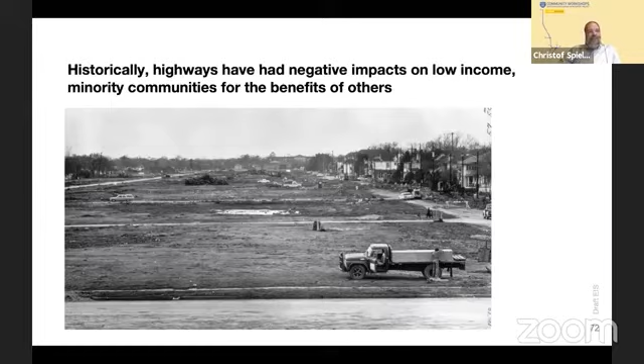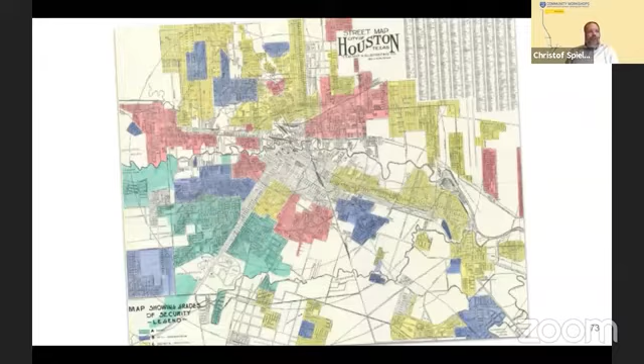If you look at the historical patterns of desegregation, of segregation, if you look at the historical redlining maps, you will notice the degree to which these highways were planned through Black and Hispanic neighborhoods when they were first built. And we can look in Houston at the impacts that those had.

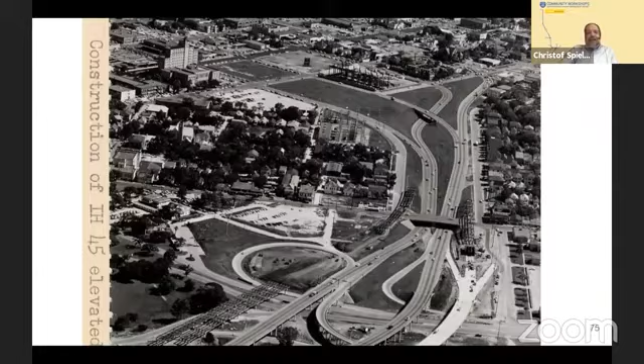Not only did this highway take out a significant swath of the neighborhood, it transformed everything around it. Within a short period of time, that commercial heart of the neighborhood was entirely gone, replaced by an expansion of downtown, as this highway literally cut those commercial businesses off from the neighborhood that they belonged to.

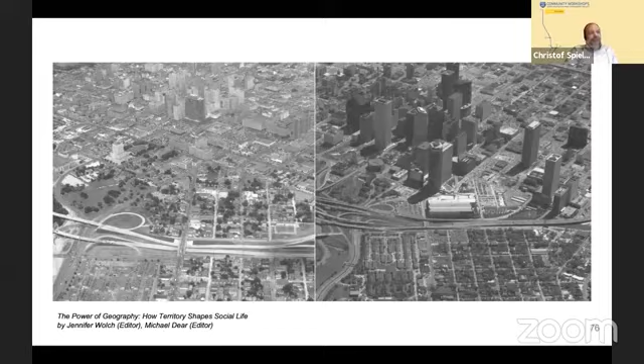And all of this happened in an era where not only was there no kind of environmental regulations around highways, but we didn't even have the Voting Rights Act in place. This was a period in which these neighborhoods literally did not have a voice in this. And you can see what happened.

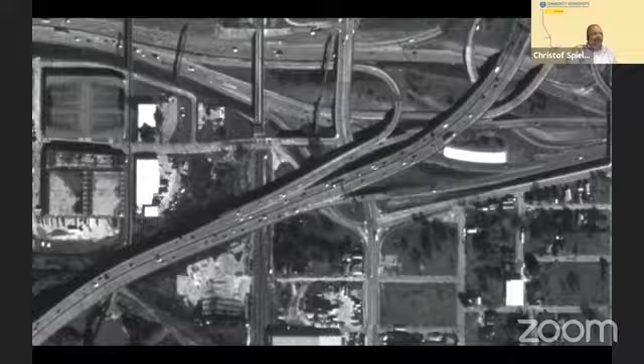What we note when we look at the analysis of this project is that this really was not taken into account. All of the alternatives in segment 2, which did not add lanes, were eliminated at a point in the process before community impacts were evaluated. By the time the evaluation criteria considered displacements, all of the narrower versions of this project were already eliminated.

And in that first screening, there is only one case where right-of-way was considered, which is right around the North Main Cavalcade area, which also happens to be the richest and widest segment of segments 1 and 2.

So basic question here: is it acceptable to have negative impacts on low-income minority communities so that others can have a better commute? And should this project mitigate its own impacts, or also the impacts of the original highway? Do we take past injustice as a baseline, or do we try to remedy that?

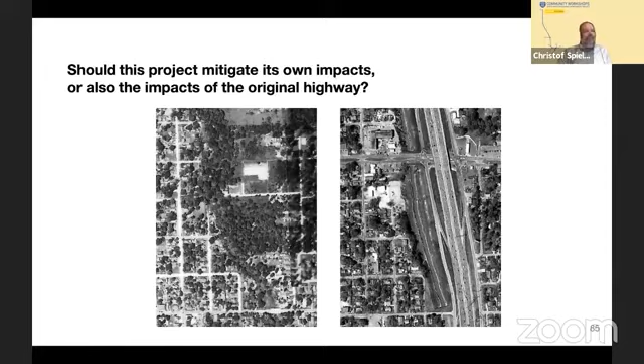Secondly, traffic projections have not matched forecasts. If you look at the traffic report that this project was based on in 2014, looking at 2011 traffic numbers, the projections in that report have not held up. Traffic has actually gone down rather than increased. So one of the basic statements that this project is based on has not actually held up.

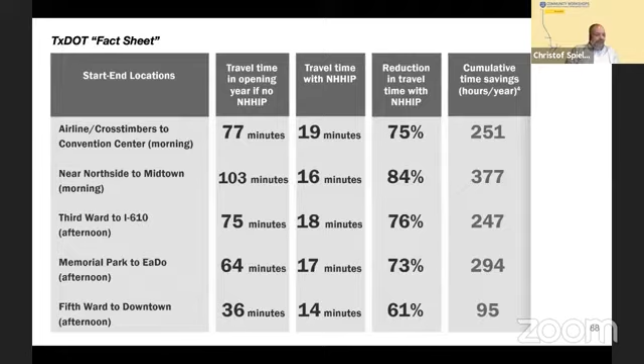You can look at projections for future travel time in here. See that the project is projecting a significant increase in travel time if the current highway stays. We don't know that that matches up with what's actually happening.

And we also know that if we add capacity, it doesn't necessarily reduce congestion. This is the Katy Freeway. It was widened, which meant traffic sped up, but then the amount of traffic on the freeway close to doubled. And as a result of that, it's now moving slowly again.

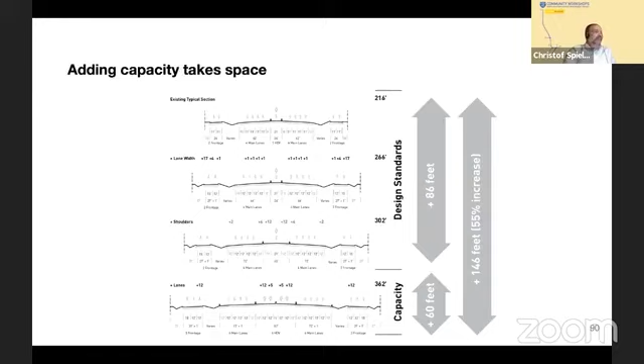And adding capacity takes space. Those additional lanes are directly leading to homes and businesses being displaced.

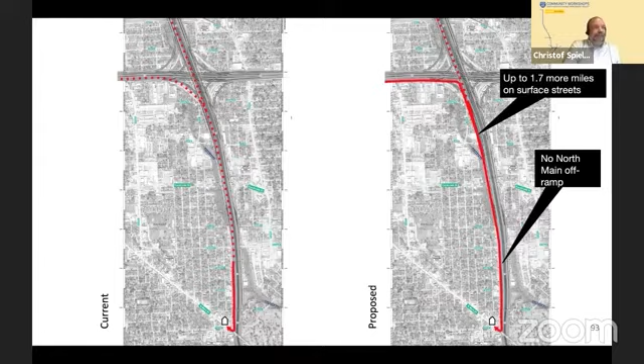We need to consider impacts on local traffic. This project does things like remove the North Main off-ramp, which means people have to drive an additional 1.7 miles on surface streets. We need to understand the impacts that this project has on local traffic, because simply making freeway traffic better doesn't do any good if neighborhood traffic gets worse.

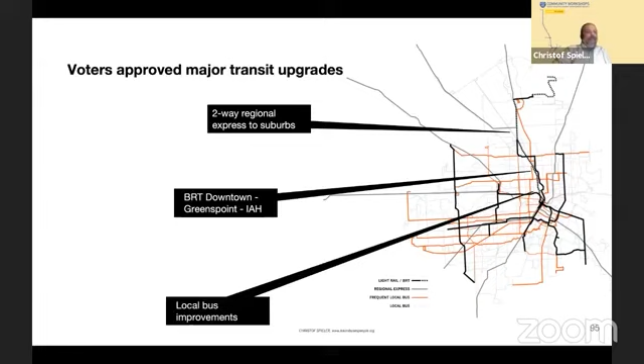We need to take advantage of the Metro Next Transit improvements. Voters approved local bus improvements, BRT, two-way regional express bus service. The potential of none of that was considered in developing these alternatives.

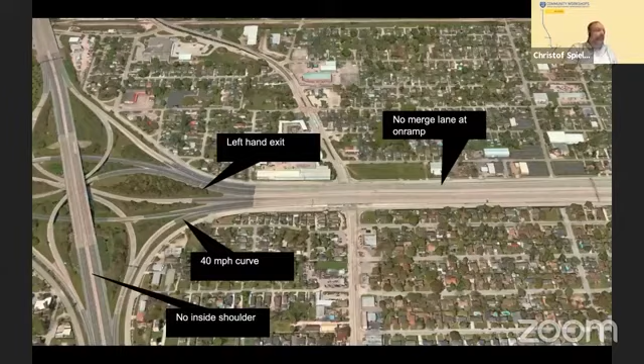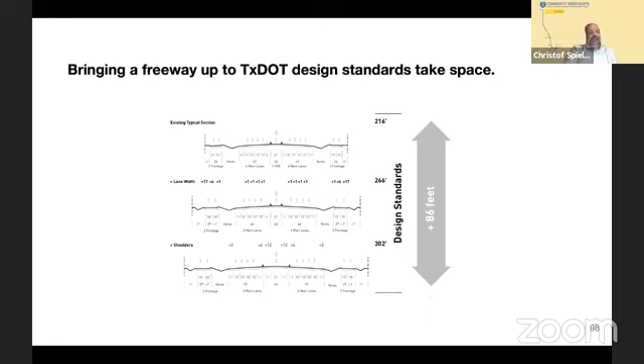And we know we can reduce impacts through design standards. This stuff matters. Not having a merge lane matters. Left-hand exits matter. 40 mile per hour curves matter. Not having an inside shoulder makes a freeway less safe. But we think we really have to consider each of these, because bringing a freeway up to design standards also has significant displacement impacts. Different design standards, different aspects of this, don't all matter the same. So we think this also needs to be considered.

We need to understand freight movement. The traffic studies for this project were really based on the movements of single occupant vehicles, but freight isn't going to the same places people are. And so if we really want to build a project which will improve freight movement, we have to understand freight movement.